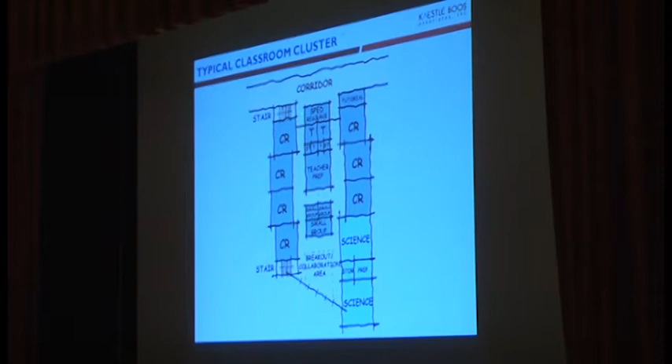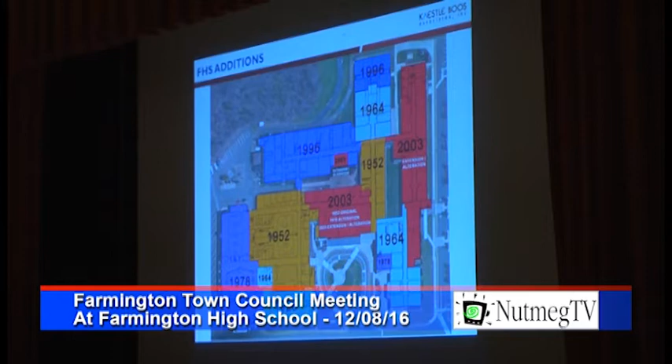And outside you would get to some specialized rooms such as special ed or tutorial spaces. These fluctuate depending on where you are in the building, but they're outside the cluster, yet also adjacent to it, so students don't have to go across the facility to find those spaces. We've seen this map. Bill explained it very well. Over time, this whole facility evolved, and it's become a one-story, sprawling facility that takes a long time for students to get from one point to the other, travel time, among other things.

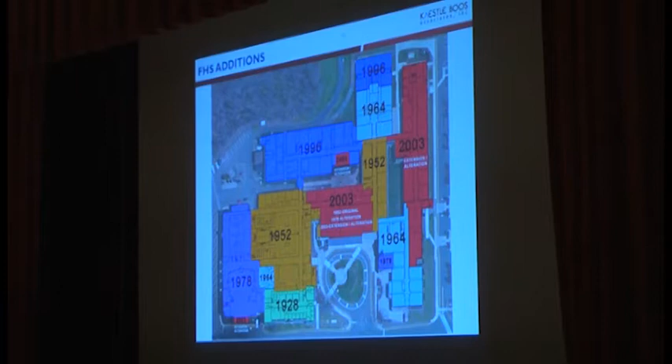This is another diagram of the same layout, just showing the age of the building in a quick snapshot. What you see in red is the 2003 addition with the cafeteria, from extension and alteration projects back then, so that's 20 years old or less. The blue represents the '96 additions, about 20 years old, and the green represents everything approximately 30 years or older.

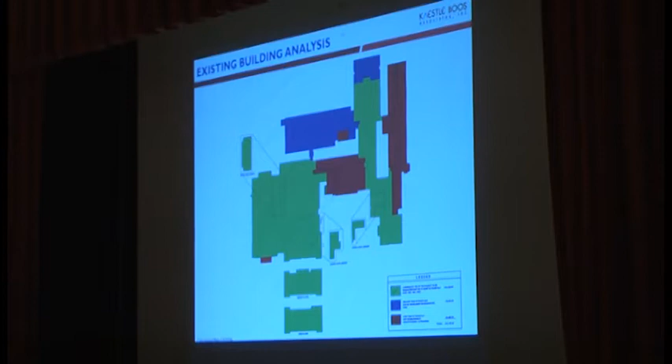Luke's going to come up here for a moment and talk about Concept A, site plan. As Paul mentioned, we went through a series of three different concepts, two of these being renovation and addition, working with some of the existing building, and the third being a new concept. So this is the first of the renovations.

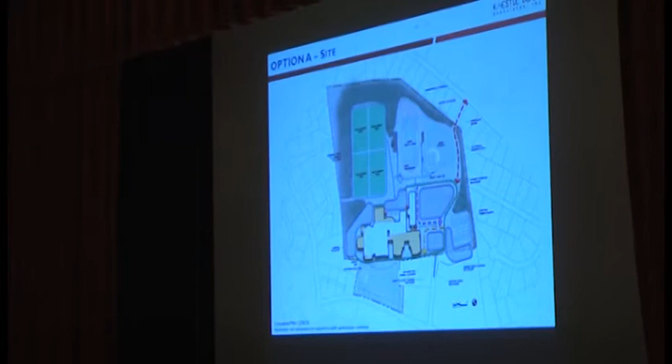Looking at the building here, the white pieces you see are portions of the school we've tried to use but will be repurposed within it. Different programs potentially moved, and Paul will talk about that in a second, whereas the tan is where additions would be added on. So what we've been able to do is push the building more in a linear direction here.

If you were to come up from Route 4 and enter in, we've looked at creating the main entry for the school right here, similar to where the parent drop-off is now, which would be the one main entry for buses and parents. If you're a bus, you'd come up, have the bus drop-off here along the yellow dashed line, and come back out.

If you're a parent or student drop-off or pickup, you'd come along the top here, follow the purple line, drop off here, and come back out this way. One thing we'd look to do at this point is designate that buses would have the right of way during drop-off and pickup times, so when buses have loaded up and are leaving, they'd have the right-of-way to leave the campus all in one shot.

This would allow us to use this area here to stack parents and students trying to leave while the buses get out, since currently both try to leave at the same time, which sometimes causes conflict that holds up the buses, which have to drop students off and then make it to the other schools in town. So this would force that separation.

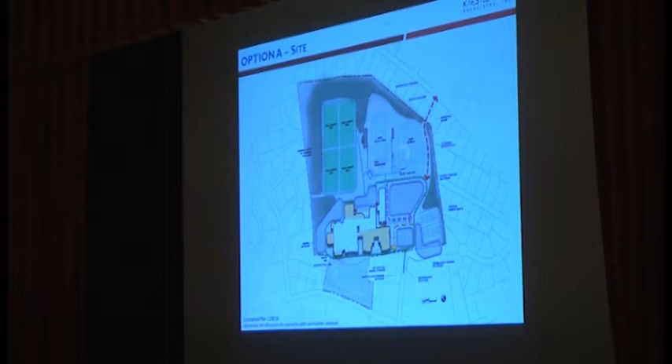Let me move this over a little bit so you can hear better. So this is the floor plan of Concept A. Can everyone hear me back there? Good, okay.

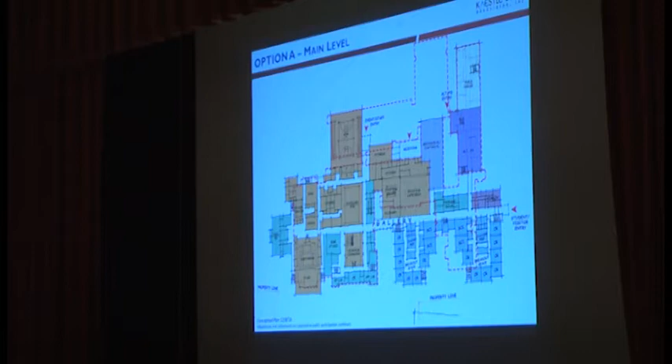So just to orient everybody, this red dashed line represents the footprint of the existing school right now. It's a little muddy, but what I want to point out is this concept demolishes a few portions of the existing facility. I want to point them out really quick: this is the 500 section of the building, the 700 wing of the building, and also the 800 wing of the building where the current library is.

Yeah, I got rid of those red markings, it's very distracting. So now that we're oriented, the big idea behind this concept is to take the clusters we mentioned earlier and place them right in the center where the circle is now, and also east of it, stacking them for 3 stories - 1, 2, 3. So we'll have 6 clusters, each with 7 classrooms, 2 science rooms, and so on.

So the big move is to put these clusters side by side, 1 and 2, and then take the 1928 building and form the media center or learning commons adjacent to the learning area. So the student zone, as I talked about before, is primarily right here. And we can organize all of this by taking the corridor that currently exists on the outside of this wall in the auditorium, that wide corridor, and drive it through to connect to the new single, highly visible, secure main entry. So let's walk through the school really quick.

If you arrived, you'd get dropped off here, as Luke mentioned, and come in the front door. You'd get your credentials if you're public, but if you're a student, you just come in. You have administration right there with eyes out front. You would have much of your learning communities right here. We would have the Friends Room, perhaps, and special services.

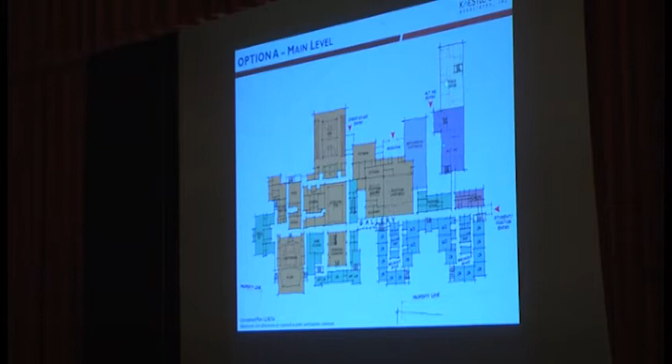As we come around, finally, the existing 2003 900 wing of the building, we could think about repurposing for the alternate high school and potentially additional locker space. We have lockers up here to the very far tip of the north of it now. We could expand on that.

If we go upstairs, upstairs would again be the two clusters stacked identical, trying to be as efficient as possible with our systems and our layouts. We would have the upper level of the Main Street, a little hole here that we could look down into the cafeteria space, so it'd be a double high volume here.

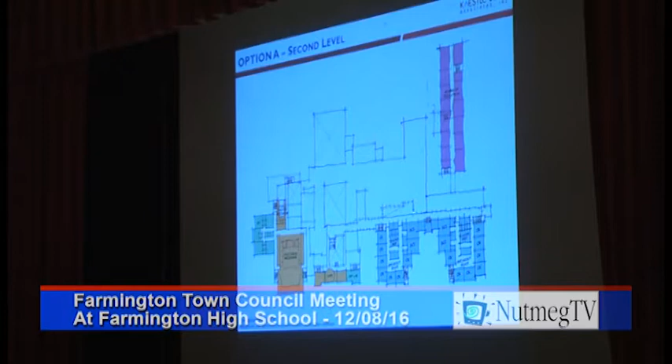This would all connect to a big, large stair that we've been calling the amphitheater stair. There's images of this later, but it could spill down into the learning commons. We could have some of the adjacent spaces, more maker spaces, and this is a collaboration space we've kind of labeled the cafe, but all circulating around this reading area.

And back over at the Performing Arts and Visual Arts section, we'd have art above here, the mezzanine level of both the studio theater and the auditorium.

And the upper level of the 900 wing, we could repurpose as well to put the Board of Ed. When this building was planned, they planned for space for a stair and an elevator, so we could probably capture that and potentially add another stair. But this could house the Board of Ed in this scenario.

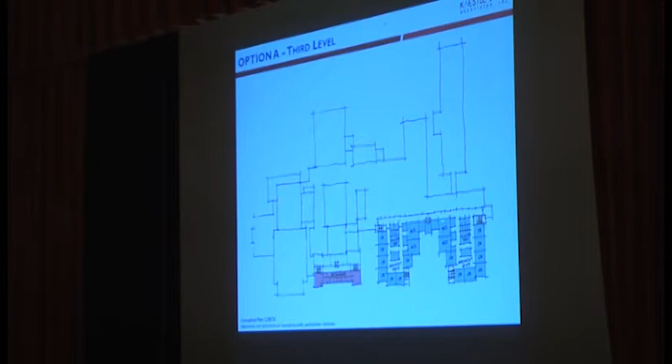And lastly, the uppermost floor, we have the same condition with the clusters, and we have the upper level of the 1928 building, where we proposed that guidance could live.

So that's concept A. Let's just go through the other concepts, then I'm sure there'll be a lot of questions we can talk through.

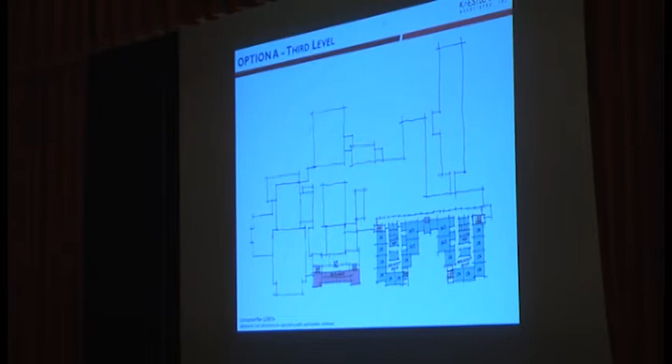And Luke will start with the site plan for concept B. Thank you. These will go a little quicker as we go through each one because some of these have some redundancies, so I'll start with a little bit of that.

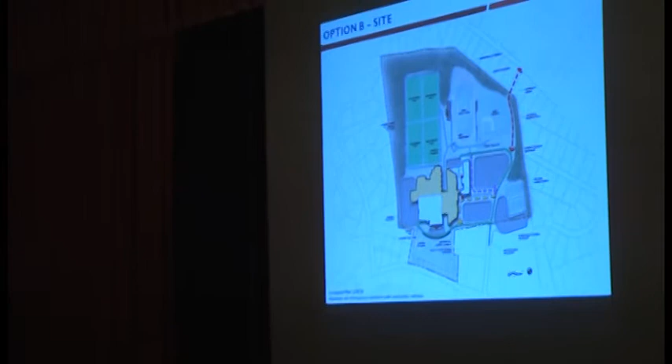In this one, again, you can see in the back we've added the fourth field. We provided the same ADA accessibility to the site features, such as your main stadium field, your press box, bleachers, your baseball field, dugouts.

So moving forward, this one again is a renovation and addition. What you can see here is this white box, and also this area here, are the portions that we're looking to renovate, whereas the tan is the areas that would actually be new construction as part of it. Again, building around those bubble diagrams that you saw earlier and trying to work the program within the existing building.

Once again, because of this scheme, it doesn't come out as far, so we're actually able to push this bus drop off.

So we'd propose to realign how you come in here. Now if you come up that boulevard, you'd actually enter straight into campus instead of having to come and bear to the right like you do now. So you'd come straight in.

Buses would come in this loop here. We'd propose that they'd have the right-of-way coming out. Parents and anyone else parked here or picking up would make their loop through, pick up, and then stack here while the buses are leaving.

The main entry would be here. We'd again have that building piece there, but what we've also been able to do is continue the roadway back through the rear here and provide some parking to the rear of the building, allowing access there.

You can see there's a secondary point of entry right here, and Paul talked a minute ago about what that correlates to in this proposed new building.

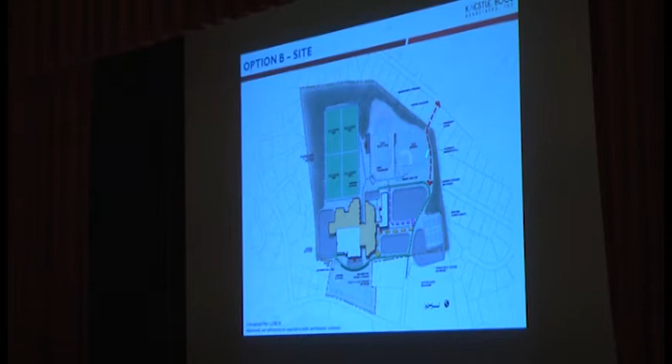Just to orient everyone again with the red lines, this is the existing footprint of the current building. In this scenario, we would consider demolishing the 400, 500, 700, 800, and the cafeteria as well.

This one is a more aggressive solution in terms of how much we would remove, so let's walk through it. Starting with the existing portion, we would think about renovating this area here.

Instead of having the east-west Main Street, which last concept A we had down here, this takes the clusters and flips them in sort of a north-south direction and takes the Main Street and brings it up to the northern edge of the existing gymnasium.

This is the existing gymnasium box right now, so everything from this line northward is an addition, okay?

So what this does is take the three-story clusters and place the Learning Commons almost between them, which is a really good condition to have the students in this student zone with the Learning Commons and Media Center centrally located. That's the basic organization of this.

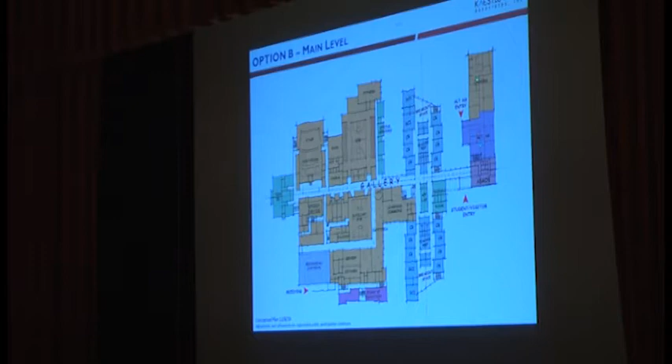As you go back into the 900 wing, we could again propose alternate high school and locker rooms as well. Some of the functions also include the maker spaces and applications labs, and a friends room, right in the student zone of the building, not in a public zone.

So the majority of the day the students would be sort of in this zone, and then they'd go to their specials and to the cafeteria through this area.

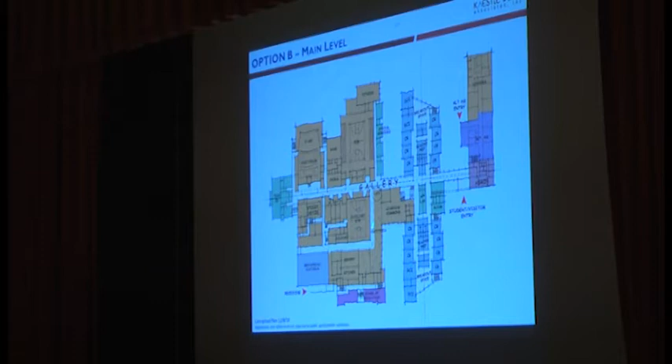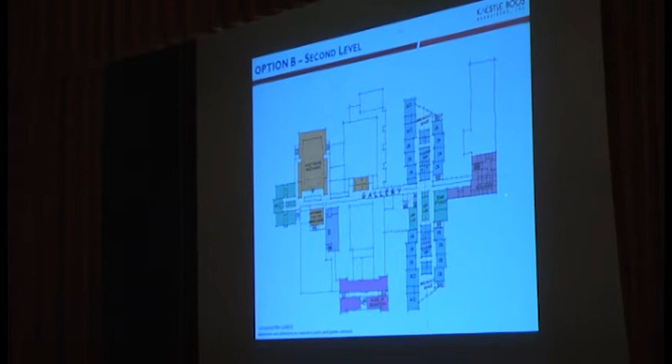The next level up is the clusters, second level, with guidance above the administration. What we could see happening is if the public came in, got their credentials down below, they'd be able to come up to guidance through a separate staircase so they don't have to travel through the school to make an appointment with a guidance counselor. They could come in, do their functions, and leave without going deep into the school. So that's a good placement above the administration.

You'd come down the gallery more off to the Performing and Visual Arts wing over here. The Board of Ed is in the 1928 building, which is completely separate, with its own separate entry, elevator, and things of that nature.

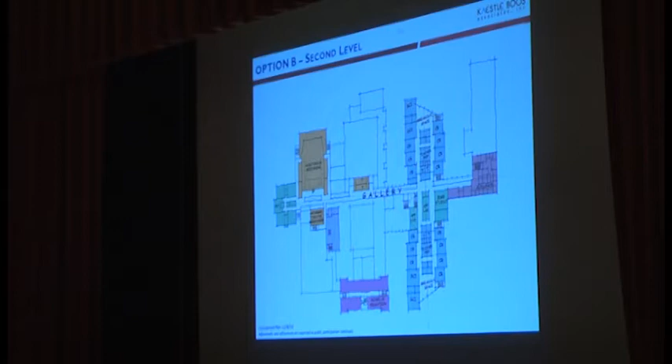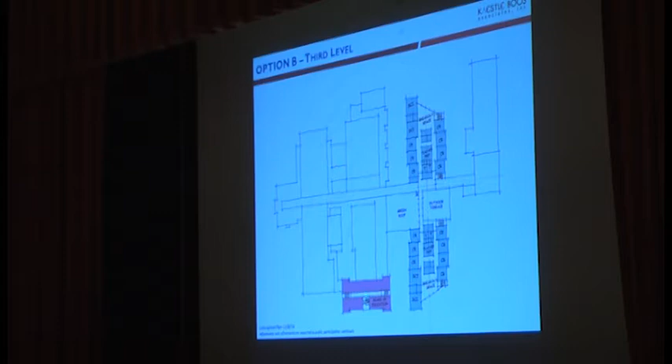The upper level is quite simple, very simple circulation between the clusters, with the opportunity for a green roof and potentially an outdoor terrace as well. And then you'd see the third level of the Board of Education.

Okay, on to the new option, option C. Again, on this one, the white shown here is what would be kept of the original facility, and this is what's actually proposed for the new high school.

To orient yourself, this is where your current three natural grass fields are up on top. You would enter the same way, with a loop road running all the way around. If you were a parent, student, or teacher coming onto campus, you would follow this around and come to either a parking lot or the parent drop-off, then loop back out.

There's a second part here, an access road and parking for the building that's to remain for Board of Education use. What's dotted here in yellow is for deliveries and bus drop-off only. Buses would come up, make their way up, drop off, then come back down and exit out. We've also shown areas for deliveries, garbage, and cafeteria needs.

That sloped area that's here, we've been able to carve out and use for the building. The clusters that Paul talked about in each scheme—I'll show you in this one—the lowest level of the cluster is actually going to be almost the same elevation as your existing school is now. So when you look at it, it might be called a basement, but you wouldn't actually be in a basement. You'd walk right out.

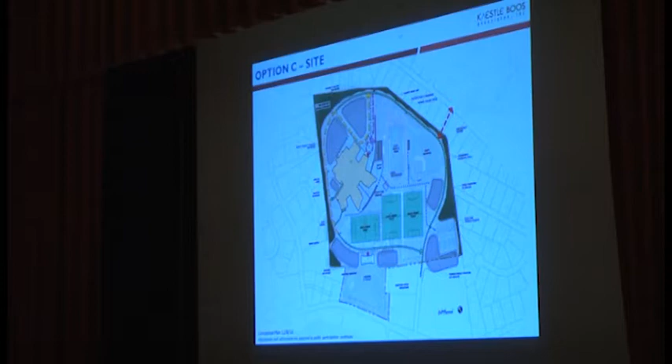We would have to upgrade the bleachers and press box for access. We were able to avoid touching the stadium field, the baseball field, or the tennis courts as part of this. To relocate the three fields, we looked at the area down here, giving us field one, field two, and a third multi-sport field. We weren't able to fit the additional fourth field, but we were able to replace what was there now. We'd also have parking down here for this building and, for athletic events, parking scattered throughout.

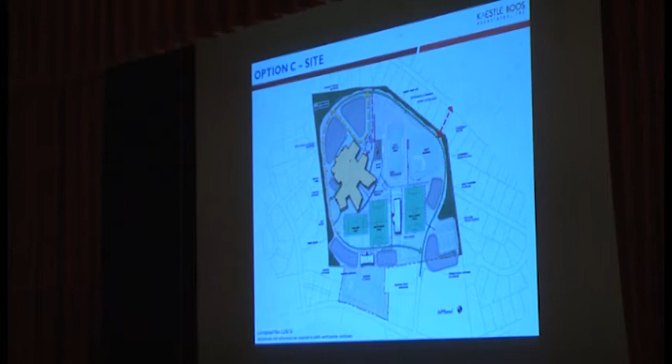Similar option for the building. We also looked at keeping that 2003 piece, which houses some of your locker rooms now, down there with those fields. We thought that could be a neat option to keep that building and some athletic functions like team rooms for students accessing these lower fields, since the high school would sit higher up and you don't want to travel far back and forth during games or halftime.

The drawback is we can fit two full-size multi-purpose fields here, but the third field becomes more of a practice field. You wouldn't be able to host a JV or varsity game on it, but you could use it for practice, rotating through when other fields are being used for games.

Again, the parking and the flow throughout campus would all remain the same in this scheme. It's simply the area right in here. All these pods and clusters, Paul's going to talk about—these two parts here to orient yourself—they would look out over here.

So you'd look over your fields and then down onto Route 4. If you're coming up to enter, the thought was it would feel like a campus, like a college campus, where you're pulling in, there's a lot of green space, you see the fields, and then you see the building set up and back as you enter. With that, I'll turn it over to Paul to talk about the building.

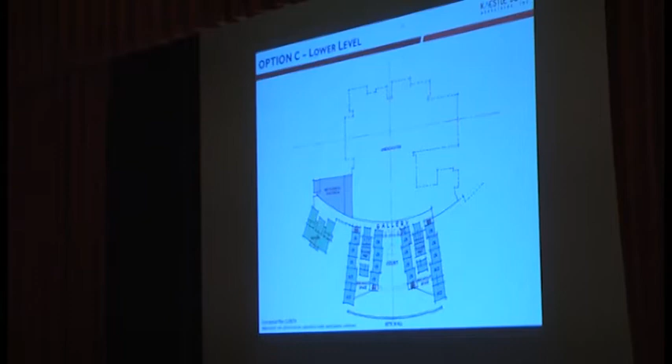As Luke mentioned, the position of this new facility is driven by probably the biggest opportunity on this site: the views from up on top of that hill. If you think back, the original designers and builders of the 1928 building probably had that in mind when they positioned it on top of the hill.

We could do a similar move and take advantage of the fields on top of the hill, positioning it so that, as Luke mentioned, you get to the top of Monteith Drive. What you would see at the top of this hill is a green belt of the campus in front of you, and then a view of the facility up on the hill oriented toward that approach.

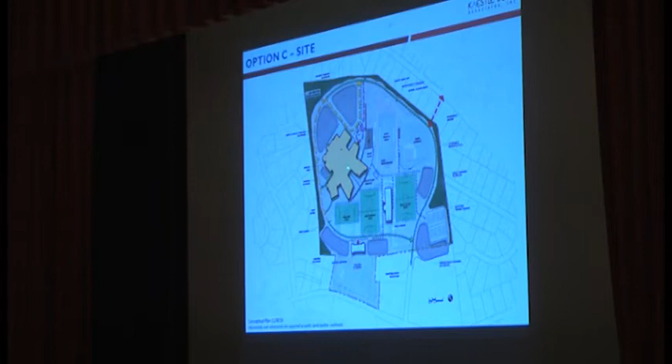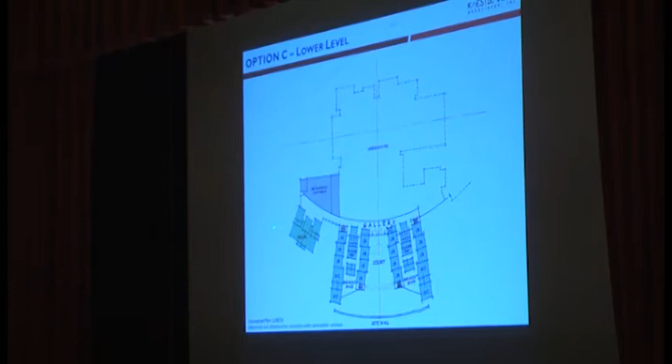As you'll see upstairs, the whole Main Street concept we've been putting forward in concepts A and B—this arcing motion here is the same concept positioned on top of the hill, all oriented toward the view to the south. Even the clusters at the tips, the breakout space could be all glass, overlooking the Farmington River.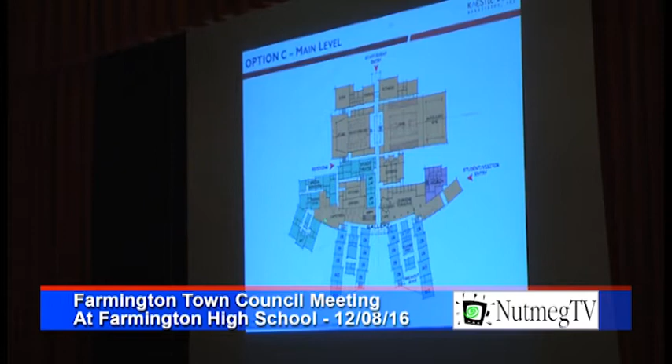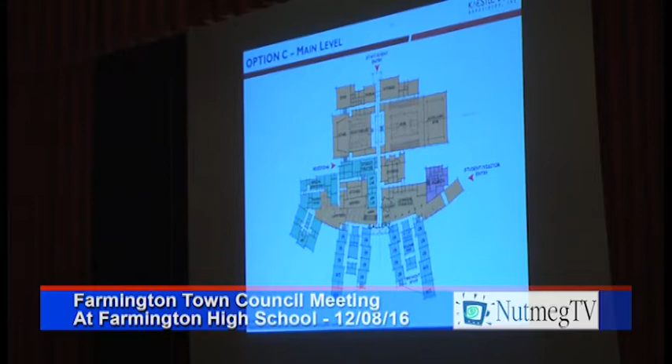This could bend to form into the hillside and have the clusters basically projecting out off the hill. You'd have glass all across the front here, oriented toward the Farmington River. As you approach the building, this is the student zone again, with the public zone back here.

You'd come in, administration up front, right to the media center, learning commons, more collaboration space. We could have the culinary program here off of this spine, this amphitheater, or another collaboration space. Oversized stairs could be here, leading right to the cafeteria, with receiving here and a new kitchen and servery feeding it.

We could have seating against the glass, overlooking the views toward the river. And at the end, we could have some special services like the Friends Room adjacent to the cafeteria, and art as well, stacked above Tech Ed below.

This is where most of the students would live, and other than being in their clusters or traveling vertically, this is sort of the heart of the school—as we saw in Frank's diagram, that's the heart right there, right in the middle. Coming in from the public side or staff entry, we have a single entry, a shared lobby between the auditorium and the gymnasium.

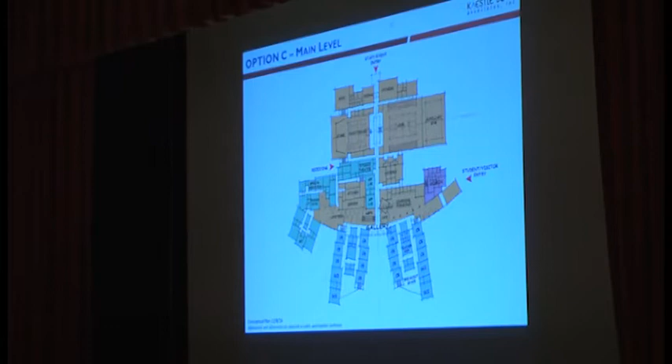Here we have a double gymnasium plus an auxiliary gymnasium, whereas the other two scenarios were always showing using the existing old gym for the auxiliary gymnasium. So all the PE functions and fitness could be here. Again, this could be accessed by the public from outside. We'd have lockers inboard, an auditorium with a choral and band and practice rooms between them, and a black box theater adjacent. So this is sort of the performing arts wing on this side, and the PE side over here, with receiving on the back side. Luke showed the perimeter road, so we could have receiving back here. The uppermost level has clusters again, and gallery space.

These represent open-to-below areas, where you could look down into the cafeteria, look down into the Learning Commons and Media Center. Guidance is again stacked above administration, so the public doesn't have to walk through the entire facility. There are more maker spaces, the Edge Studio that Farmington currently has, and there's even thoughts that we could expand in the future if we chose to do so. We'd have room for that, and a green roof potentially.

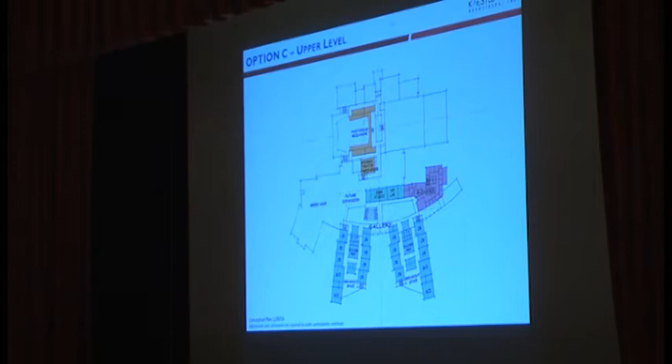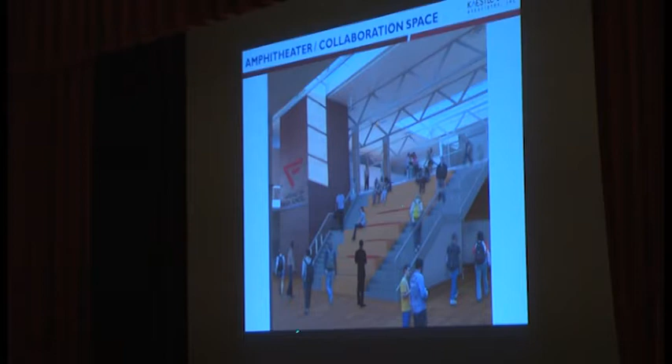We could walk right out. And this is again the mezzanine levels of the auditorium and studio black box theater. So that's the uppermost level, and that's the example of what we have in mind for the amphitheater, where it's really, it's a multi-purpose use here. It double dips as a large group gathering space, and it's used as vertical circulation as well. So it's taking advantage of both conditions. And it could be a good social component for students at school too.

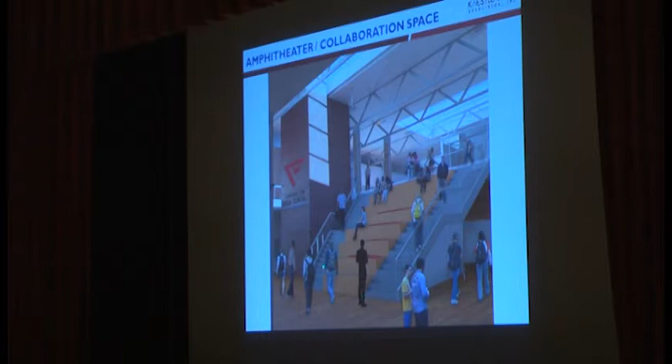And I believe that's it. That's it. So with that, I'm sure there's a lot of questions. And again, this is all a work in progress, and we want your comments because this will be evolved.

Well, this is the newest part of the additions that have been put on the complex, so it's new, and we're trying to repurpose it. It would be nice if we could just keep them as classrooms, which we could, but it doesn't really solve the remoteness issue and the sprawl for kids to travel. So we've been thinking that it may get repurposed for something else at this time.